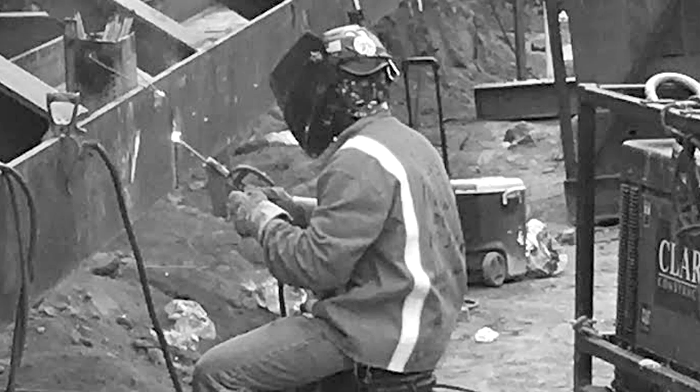I'm Dave Doolin. I grew up in Annapolis, Maryland, second generation iron worker at Local 5. My father was an iron worker before me. My name is Tony Franklin. Grew up in the Fort Washington area, been there all my life. I've been with Clark Foundation 28 years.

I'm Jose Ambriz. I grew up in Michoacan, Mexico. Came here in 1993, I was 16 years old. When I was in Mexico with my family, we were working on the farm with my dad and my brothers and sisters. The work was kind of born into me, I guess. When I was a kid, I was always building stuff when I was 4 and 5 years old with a hammer and a nail, and sometimes I got a backhand because I put a nail somewhere I wasn't supposed to.

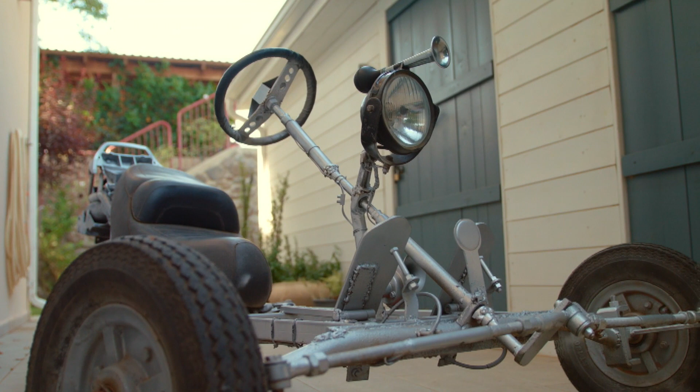When I grew up, I always liked to fix things. I like to take things apart. My mom and dad would come home and find the garage with mini bikes and bicycle parts all torn apart. So once I started fixing, man, I stuck with it, and that's what I chose. My mom worked for GM in shipping and receiving, and my dad owned his own dump trucks. So I watched him and my mom get up every morning and go to work. That made me want to work hard to do the same thing.

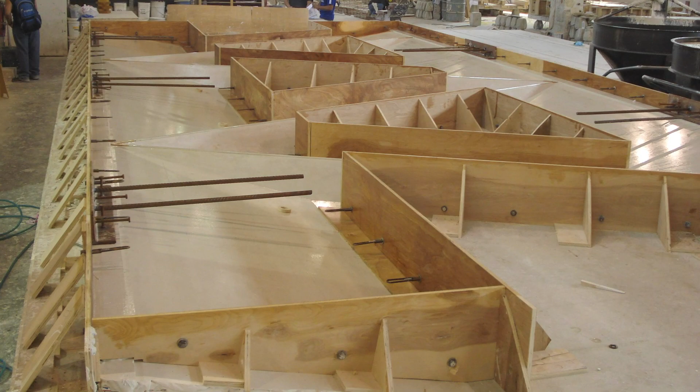I started sweeping the floors, pointing molds. After a few years, they promoted me and I moved to a steel shop. I went to another shop, on a plaster shop.

When you're working with plaster, that's amazing after you've done something. For this company, I think that's the most important thing. It's where the product comes from, and that's where the quality on the shop comes from.

And I seen the sign said Clark Construction was hiring. I started as a laborer, $7.25 an hour. I stuck with it, and here I am now.

A lot of times it's the challenges that you have on the project. The Wilson building, for example, was a curved curtain wall on an existing slab that had many different sizes, a lot of in and outs, and made it very difficult to install. And then the units were 28 feet tall too, so that was quite challenging with the weather and things like that, trying to handle those things.

I get to work 2 hours early, every day. I'm on site. When I get there, I get myself ready, prepared, paperwork, walk the site. I get up at 3 in the morning, I'm out of the house at 4, and I get to the site 4:30, 4:45. Doing it 28 years, same, getting up there early in the morning.

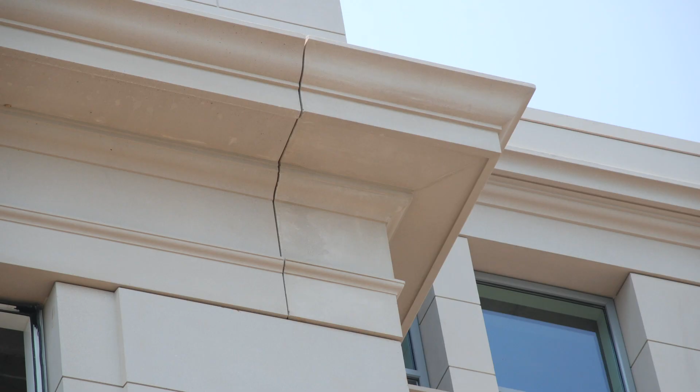I remember one that's American Pharmacists. That's a very particular job that I really enjoyed what we did. One other job was Trinity, because there was a challenge just to have it done, probably in one piece. Like in Trinity, we had to cast like 3 or 4 different pieces just to get a one piece finish. That was very challenging on one of those jobs.

The Star Award was won on the Arena Stage project, and that was a cable stay wall actually off of timber. The cables didn't hold the glass, the cables actually held the timbers up. And we had to design the wall to go onto the timber, 40,000 square feet of glass, and none of it was square. It was all canted out at 4 degrees, and it went around as a serpentine.

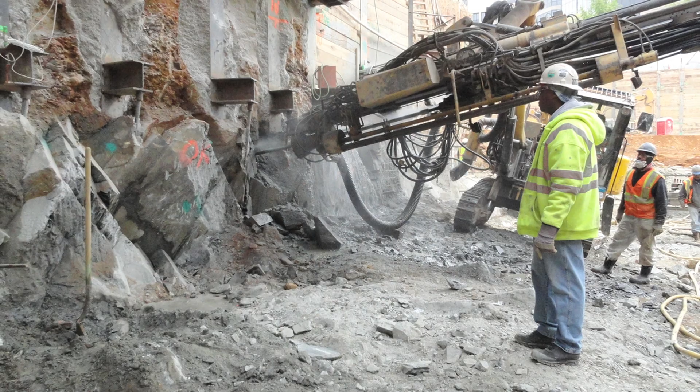The challenge is what I like. I like a challenge. They always put me on the tough jobs. Once I started running my own jobs, they give them to me, really.

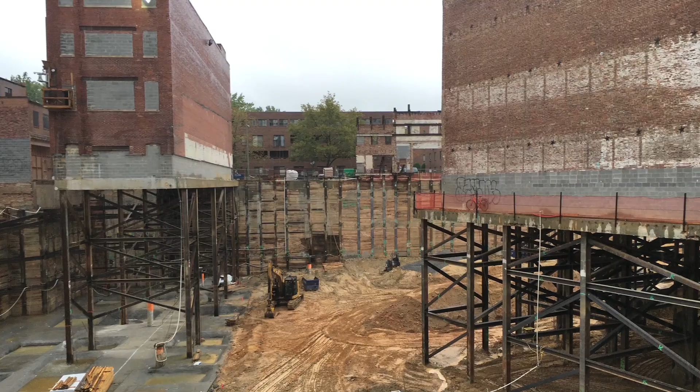We done like 1,000 Connecticut. That was a good project. Louisiana Avenue was a good project. And we just did one recently, 655 New York Avenue.

Of the architects, now in these times, they have so many weird things, all kinds. They don't want anything like a flat building all the way around. They want everything different. Every building they want different. The MGM, the challenge to cast those panels, it was complicated.

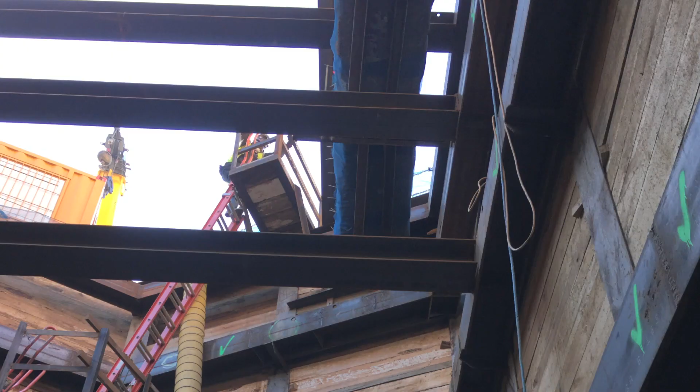If you want to do this work, you got to deal with the weather, because we're outside. There's no inside work. We're outside most of the time. But we do all type of stuff like putting in struts and steel, so it's a lot of burning and welding. People think it's just driving piles, but it's the whole foundation. It's a lot of work.

We're always looking for young apprentices to get into the trade, and it's been one of the hardest things to do, believe it or not. I really don't know whether you can make these younger people love the job. What really changed in the field is the workers.

I work with younger guys coming in, this new generation coming in. Seems like they're not focused enough, don't want it bad enough. So I try to work with them, let them know the opportunity's here if you want it, it's worth it. When I get them around me, I try to train the best I can, show them what I know, so they can put what I know, what they know, and make their own way.

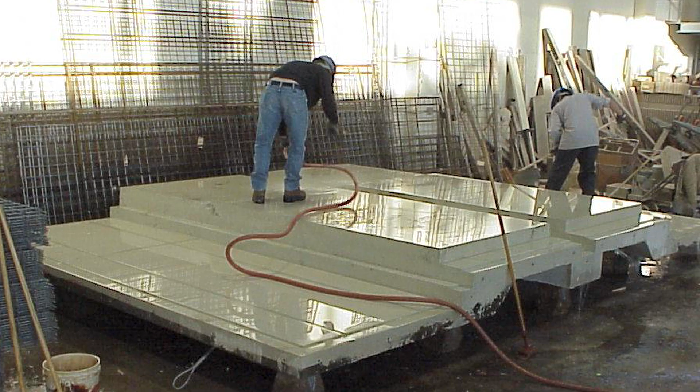I've been seeing a lot of difference between before and now. A lot of the young people, they don't have that interest to learn like we did before. I'm always able to help anybody who wants to learn. But if someone doesn't want to learn, or doesn't want to work, that's a little complicated, to teach them how to do this job.

The Star Award was really something. I mean, that was a sense of pride. For everybody involved, it was a team that made the project come together, and the right people got recognized for it. I'd like to win a couple more.

Y'all ought to keep this program. It's nice, it's beautiful. It makes people really want to work hard to try to better themselves and do a good job in their career.

When I was driving with even a friend, my family by my side, when I see a building that I know already I was involved onto it, so I told them, this building we did. I think it's a great thing.

I really do, because there's a lot of projects that you think all your hard work is going unnoticed. With the Craftsmanship Awards, it's a chance for you to get recognized, and it gives you a sense of pride in what you do. And in some way it makes you look for that on almost every project that you do.

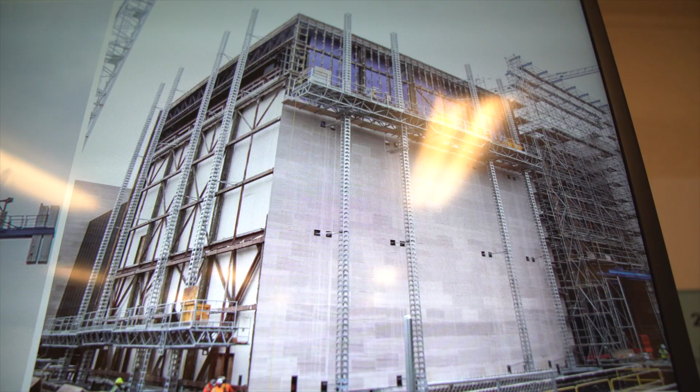Hi folks, I'm Robinson, project manager for JD Belfield on the site. I wanted to point out this picture for one important reason: it's the only chance you're going to get to see today what the phased installation looked like.

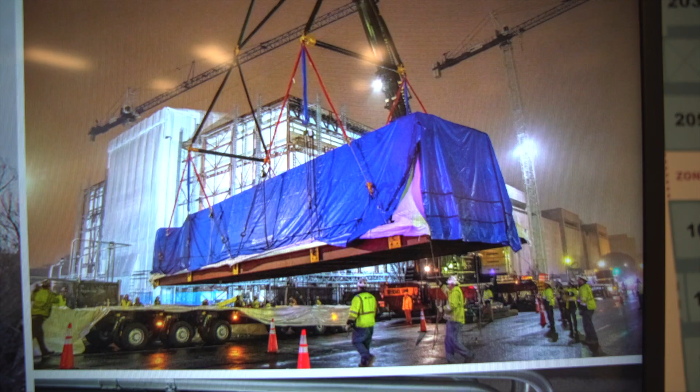When you think of a temporary roof enclosure, you have to first think about the fact that we have a steel superstructure connecting to the existing facility, passing loads into the existing facility's columns by virtue of column trees or stub outs that you can see at the bottom.

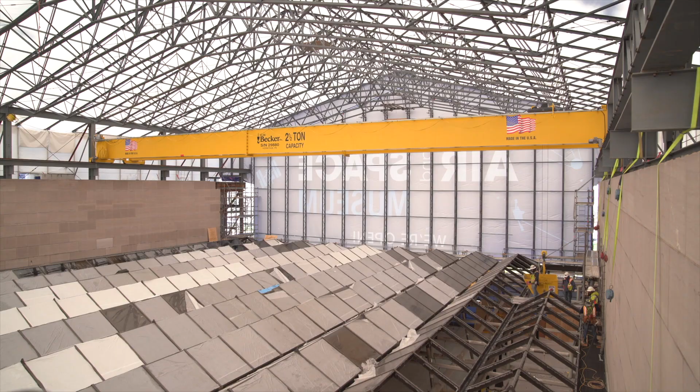One of the biggest challenges of this job was saying, how do we create a temporary roof for them to do work inside the building while the outside is being demolished, and then when we're done it looks like we were never there. Oh, and by the way, the gallery is 125 feet wide, and you have to account for 160-mile-an-hour wind loads and snow drifts up to I think 5 or 6 feet.

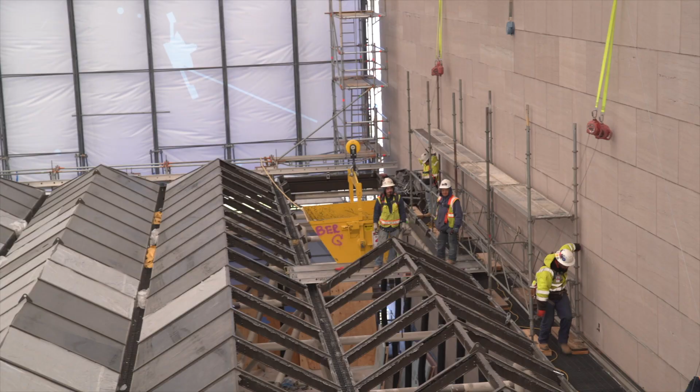Right now we're on the bottom floor of Gallery 102, and above your head you're going to see a suspended dance platform that's completely suspended from the space frame of the existing structure, so that the steel subcontractor can get up there and do upgrades to the existing space frame while that work can continue below.

So we're on the south side of Gallery 102, and what you can see here is what we call the south gable. It's an introduction up close and personal to our fabric system. It consists of a vertical track system that has a rope welt with a fabric that attaches inside. These systems are tested and designed to hold up to the snow loads, wind loads, and all the different loads that are imposed on a building throughout the time of its existence.

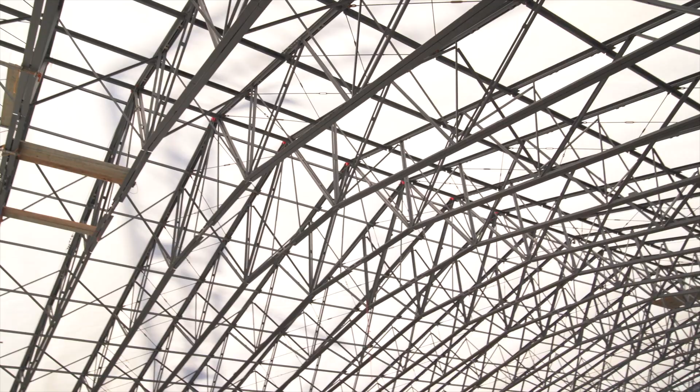There is no welding on this entire system. It is completely removable. It will actually be removed and reinstalled in a further zone in phase 2. So this material will leave the site, it will be stored for a period of time and then brought back. 100% of what you are seeing is bolted.

My name's Mary Pesic. I am an engineer with Clark. This is the National Museum of the United States Army. I'm very proud to come back to this project I helped with last year. I was here for 8 months. I'll tell you about the terrazzo process.

The contractor was David Allen. You see a pile of what kind of look like pebbles, like white pebbles, and they would mix it in a mixer with epoxy-like material, and then they would place it on the ground in the correct order. As you see, this magnificent seal has beautiful colors to show the Army seal.

After they placed the material in the ground, they would grind it with a big grinder. Once they were completed with the grinding process, we would walk it with the architect and document all the punch list items - if there were any blemishes that we could fix, if it was dirty, if it was scratched, or any pinholes or anything like that, take care of those items.

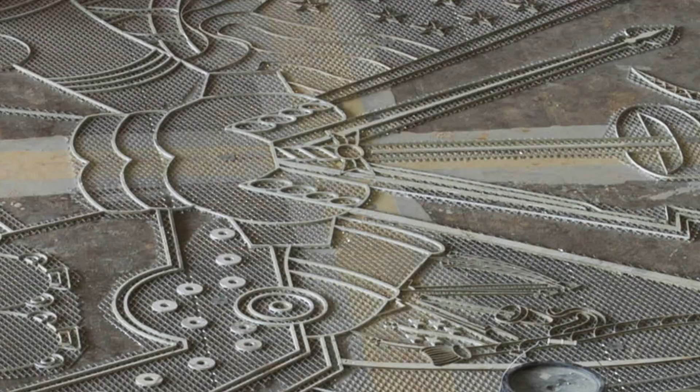We had to make sure the grid was level too, that the metal grid was just so before we placed everything. They put a sealer on it, and then we wait for that to dry, and then we protected it so that work could keep going.

We did this lobby in pieces, so we actually started, if I remember correctly, with this half over here, and then we moved to this side. We did it in segments so that we could continue work around it.

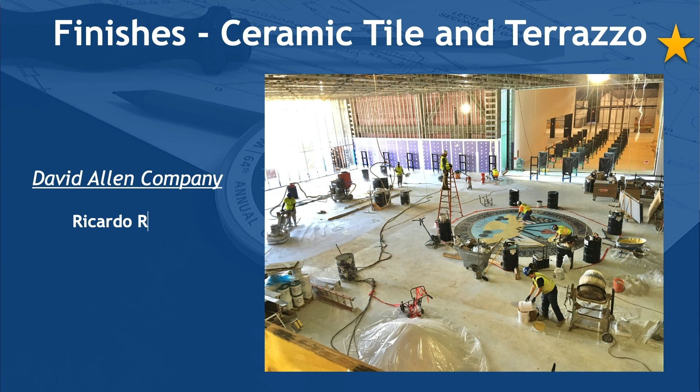In the category of finishes, ceramic tile and terrazzo, Ricardo Rosa, Enrique Torres, with David Allen Company. Project, National Museum of the United States Army.

In the category of finishes, ceramic tile and terrazzo, Viswas Alba, Alex Gavarrete, Telly Kutris, Tony Martinez, Vince McCoy, with Eris Tile and Flooring, LLC. Project, Portals 5. In the category of finishes, drywall, Ronald Diaz, Bill Dick, Elmer Monterasso Avila, Hector Pineda, Ricky Rogers, with Bradleigh Applications. Project, 6th and Historic Synagogue.

In the category of Finishes, Drywall: Ben Carper, Rick Finocchiaro, Mike Fleener, Roger Rocha, Mark Schneibolk, Jill Schneibolk-Wolfrey, with Form Construction Services, Inc. Project: Host Hotels and Resort HQ.

In the category of Finishes, Painting and Wall Covering: Christine Davies Anderson, Jonathan Castro, Rolly Oliveira, Tim Phoebus, with Hales & Howe, Inc. Project: Arlington House, the Robert E. Lee Memorial Preservation.

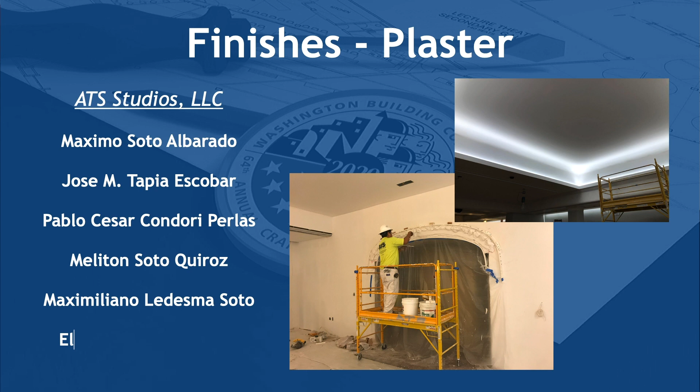In the category of Finishes, Plaster: Máximo Soto Albarado, José M. Tapia Escobar, Pablo César Condori Perlas, Melitón Soto Quiroz, Maximiliano Ledesma Soto, Elmer Ferrufino Zurita, with ATS Studios, LLC. Project: DAR Museum Gallery.

In the category of Finishes, Plaster: Christine Davies Anderson, Jonathan Castro, Rolly Oliveira, Tim Phoebus, with Hales & Howe, Inc. Project: Arlington House, the Robert E. Lee Memorial Preservation.

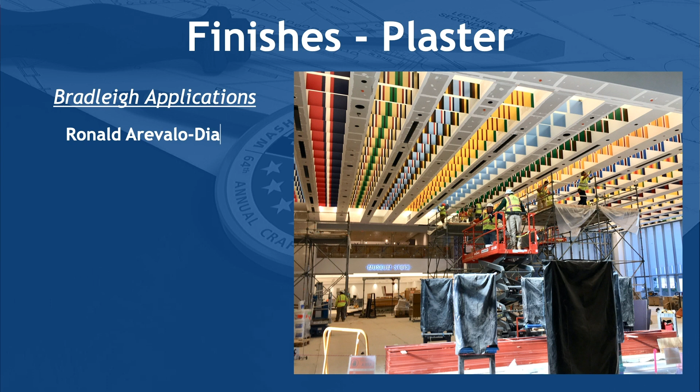In the category of Finishes, Plaster: Ronald Arevalo Diaz, Delfín Cayapa Pazzi, Elmer Monteroso Ávila, Héctor Pineda, Jesus Soto Soto, Santiago Trujillo, with Bradleigh Applications. Project: National Museum of the United States Army.

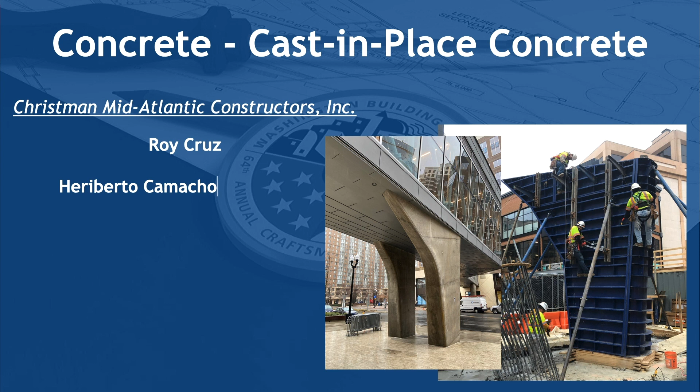In the category of Concrete, Cast-in-Place Concrete: Roy Cruz, Heriberto Camacho Hernández, Daniela Holguín, Miguel Rivera Portillo, Donald Thurston, Candelario Torres, with Christman Mid-Atlantic Constructors, Inc. Project: Boston Quarter Retail Renovation.

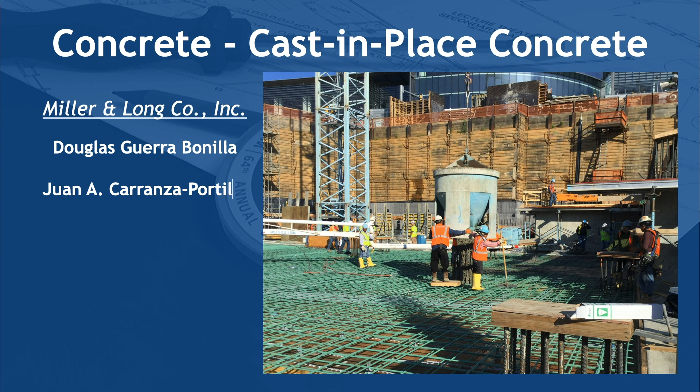In the category of Concrete, Cast-in-Place Concrete: Douglas Guerra Bonilla, Juan A. Carranza Portillo, Jose N. López, Oscar A. Mendoza Méndez, Alex Montiel, Mike Smith Sr., with Miller & Long Company, Inc. Project: Capital One Center Garage Podium and Corporate Events Center.

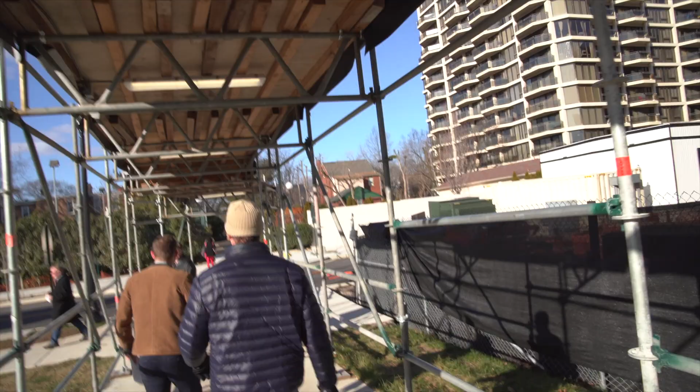This is where all the steel comes together. This is where everything is really supported throughout the building with a lot of steel truss, a lot of concrete, a lot of tonnage. We call each floor a bar - there's 5 floors, I'll refer to them each as bars as they fan out. The top part of each bar actually attaches to the bottom part of the next bar.

This is a brick rain screen. This is not your traditional brick and mortar. How this works, how it attaches back: you have steel metal supports or steel metal clips that attach back to the drywall. You then have brick trays, long horizontal trays that span anywhere you see brick. They're all snapped into a steel tray behind it. Each brick is specially molded so that it locks in and snaps in, so it's actually a pretty tight fit.

A cool feature from this rain screen - this is the largest depth system ever installed for this brick. It's called the Corium brick. It's about a foot from the drywall back to the face of brick. These soffits, just on this pivot alone, there's about 12,000 brick between these 8 soffits that you see. And as we come around, you may have seen it on the way in, there's a big feature one on the entrance to Wilson that's just 6,000 brick on its own. So it's just a lot of brick soffits on this building.

You'll actually see at the top part of each of these bars, the top 3 feet of brick is attached to the floor above. Another interesting part about this is there's no cement in this mortar, it's all a lime base. It's supposed to be a self-healing, very malleable type mortar.

It's an historic point-up mortar. It allows for more movement because of the rain screen design, since it's all cantilevered on metal. It's a little more forgiving.

What's interesting here is each building, when you get to these intersections at the end, comes in at a 22.5 degree angle, so it's very tight. We went through a few scenarios and even did some shop drawings to prefab these inside corners because of the tight angle.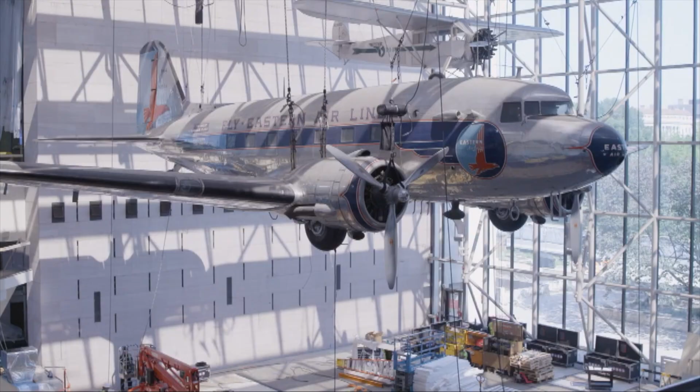I think the thing that's interesting about this project that makes it a little different than others is that we have to keep the museum open while it's going on, and it's still full of artifacts. So it's not just a construction project, it's also an artifact move project, and that's definitely added a layer of complexity. One of the challenges was we've got to depopulate all of the artifacts in the building.

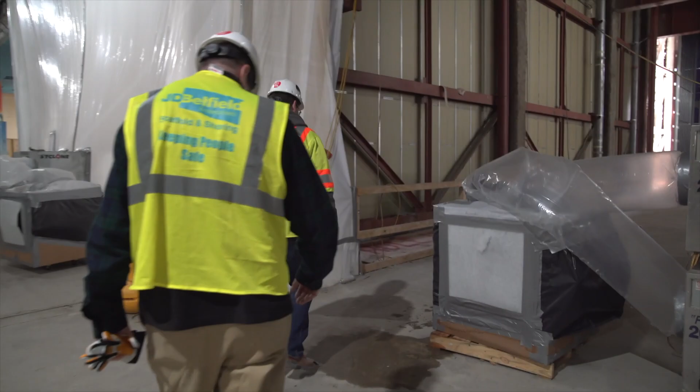For this half of the building, it's somewhere in the neighborhood of 17,000 artifacts. These are fully weighted aircraft, not small replicas and lightweights. I'm Kyle Nolan, the CPM for the move contract for CSC.

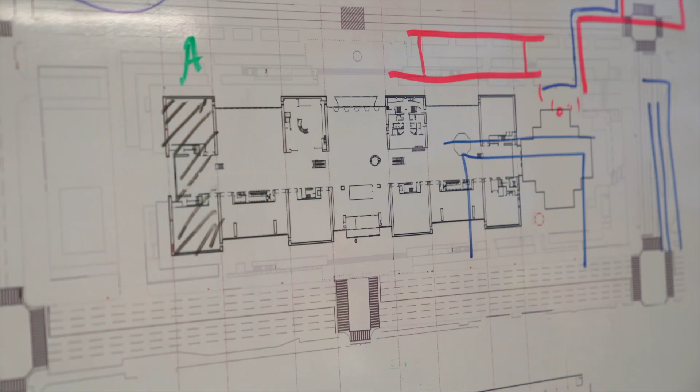I'll use this graph to explain. The building's in 7 zones overall. When we started on the move side, zone 1 and 2 is where we were. In the garage, they were all the way to zone 6. So while we were actually taking things to West Terrace, as Russ just mentioned, we had to expedite the base construction reinforcement. We did all the FRP around the columns, additional steel reinforcement, because we couldn't even get some of the planes out of the building at that time.

My name is Russ Dusek, and I work with iWay. I designed and executed, along with my team, all the rigging related to the project. This is much different than anything else I've worked on. I've moved a lot of artifacts, but what was truly amazing was just the number of people involved and the coordination effort that had to happen, and all the different disciplines that had to come together to ultimately be able to lower the DC-3.

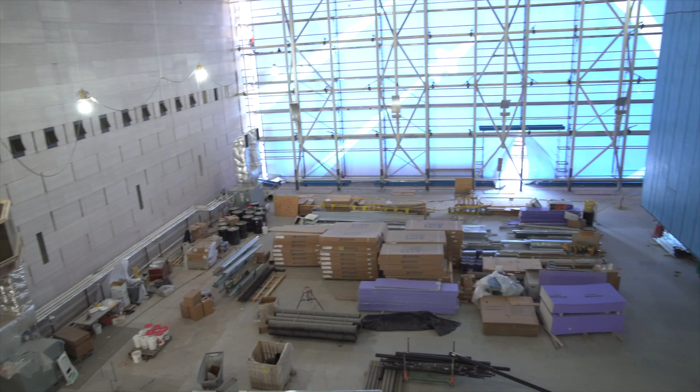So we are now standing in Gallery 102, one of the 3 main big atriums in the Air and Space Museum. There were, I believe, 8 airplanes hanging here that were some of the largest in the entire collection of the Air and Space Museum. They all were installed here while the museum was being built, and the museum was finished around the artifacts.

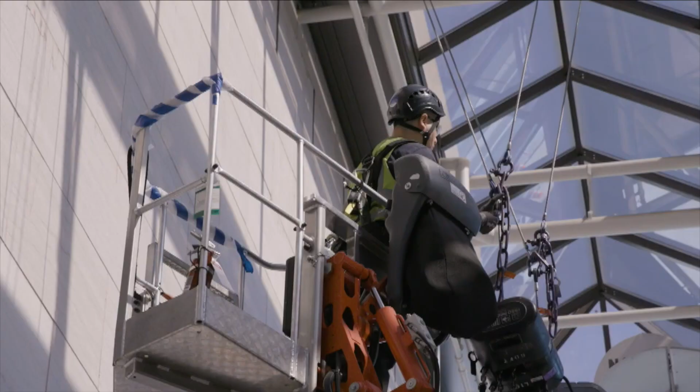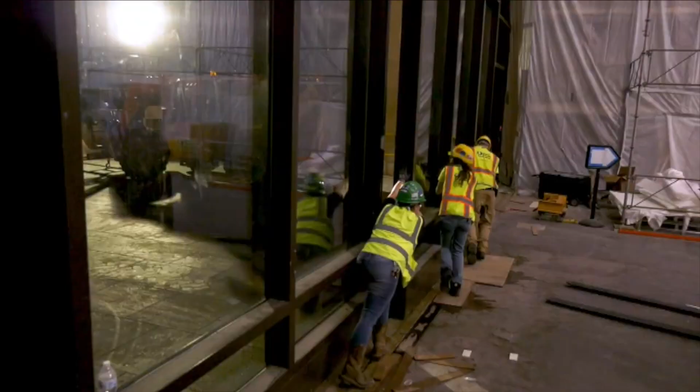Russ, do you want to get into the specific rigging challenges of these artifacts? This is some of the biggest artifacts we had to deal with. Once it was lowered to the floor, these artifacts were big enough that I additionally had to come up with rigging submittals and the same process to disassemble them, because just the wings on the DC-3 were too large for just a few people to grab and take off and put on a cart. But once again, circling back to what everybody keeps saying here, the coordination effort on this extremely large project was just astounding that it went as smoothly as it did, and it did go very smooth.

Now, we would like to recognize our second set of award winners in the metals, mechanical, and special construction categories.

In the category of metals, metal panels: Rick Dickens, Ron Neff, Tyler Vogel, David Watson, with Tecta America East, LLC, Project National Museum of the United States Army.

In the category of metals, miscellaneous metal fabrication: Michael J. Burros, Oscar Flores, Andreas Papas, Jose Villatoro, Robert Windsor, Nicolas Sorica, with TLP Steel Erectors, Project Tegna.

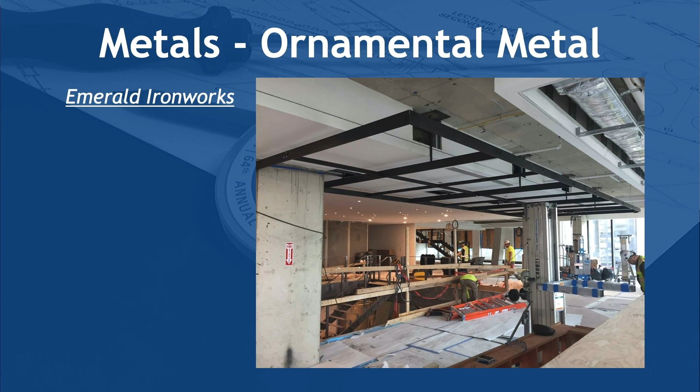In the category of metals, ornamental metal: Noe Carballo, Luis Céspedes, Erick Garcia, Troy Knotts, Jason Taylor, Byung Yoon, with Emerald Ironworks, Project JBG Smith Headquarters.

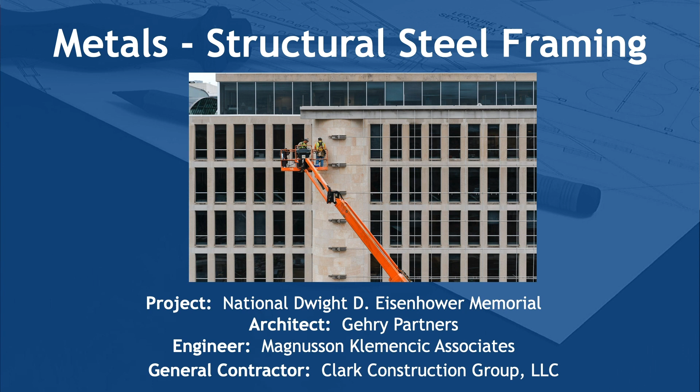In the category of metals, structural steel framing: Jeffrey Collier, Anthony Capusta, Randy Keller, Robert Ocasio, Keith Ritalik, Paul Swigert, with Crystal Steel Fabricators, Inc., Project National Dwight D. Eisenhower Memorial.

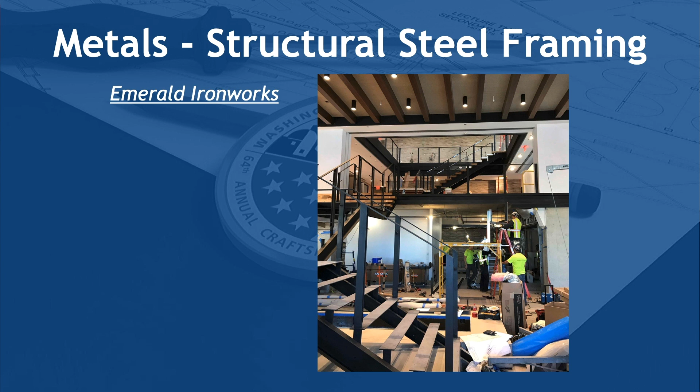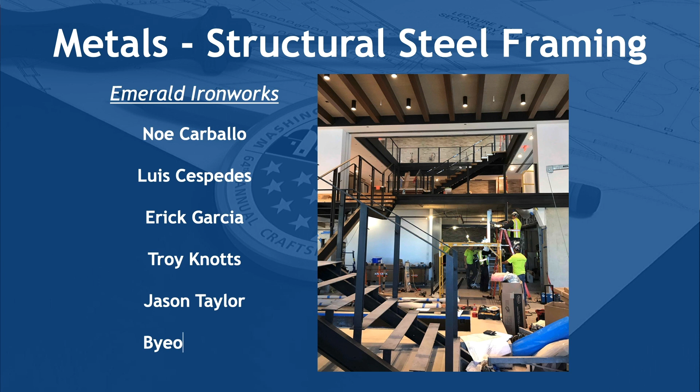In the category of metals, structural steel framing: Noe Carballo, Luis Céspedes, Erick Garcia, Troy Knotts, Jason Taylor, Byung Yoon, with Emerald Ironworks, Project JBG Smith Headquarters.

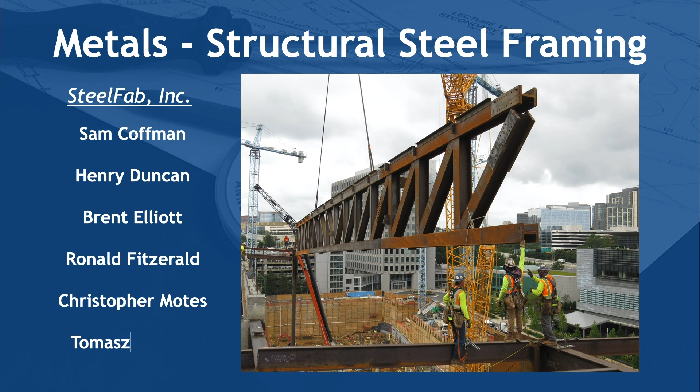In the category of metals, structural steel framing: Sam Coffman, Henry Duncan, Brent Elliott, Ronald Fitzgerald, Christopher Motes, Tomasz Pasierb, with SteelFab, Inc., Project Capital One Hall.

In the category of metals, structural steel framing: Russell Bell, Chuck Jones, Mark Stryker, Jim Yowell, John Yowell, Mike Yowell, with Maryland Fabricators, Inc., Project City Ridge.

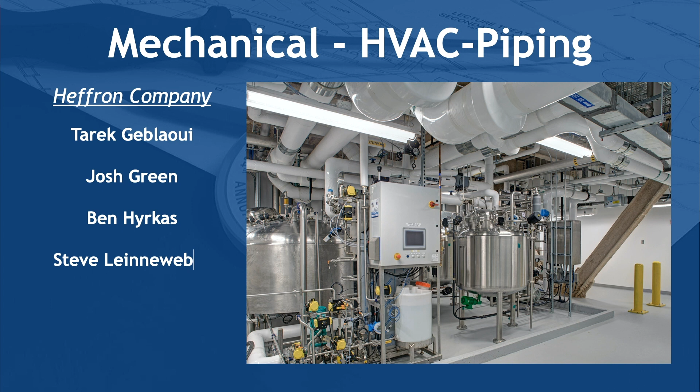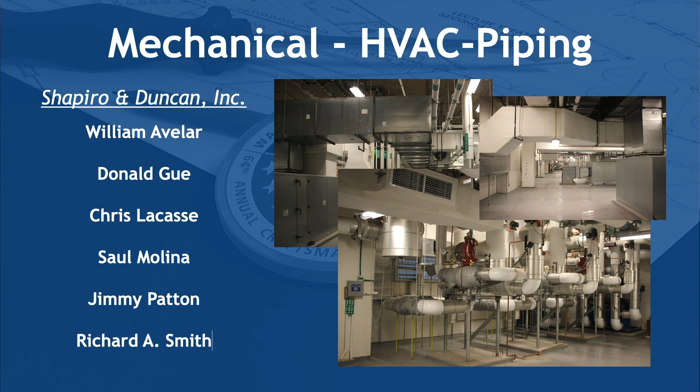In the category of Mechanical, HVAC Piping: William Avelar, Donald Gue, Chris Lacasse, Saul Molina, Jimmy Patton, Richard A. Smith, with Shapiro and Duncan, Inc., Project Inova Loudoun Phase 2B Patient Tower.

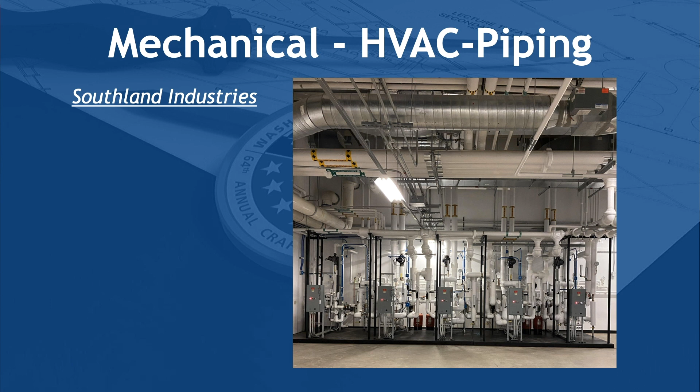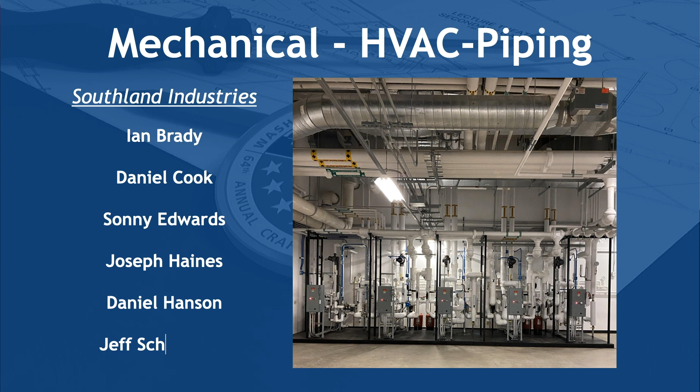In the category of Mechanical, HVAC Piping: Ian Brady, Daniel Cook, Sonny Edwards, Joseph Haines, Daniel Hanson, Jeff Schwabline, with Southland Industries, Project National Museum of the United States Army.

In the category of Mechanical, HVAC Sheet Metal: Aaron Ittenbach, Russell Johns, Daryl Milsteed, Jimmy Redding, Ben Rowe, Ray Sprouse, with ADJ Sheet Metal, Inc., Project Carnegie Library Renovation.

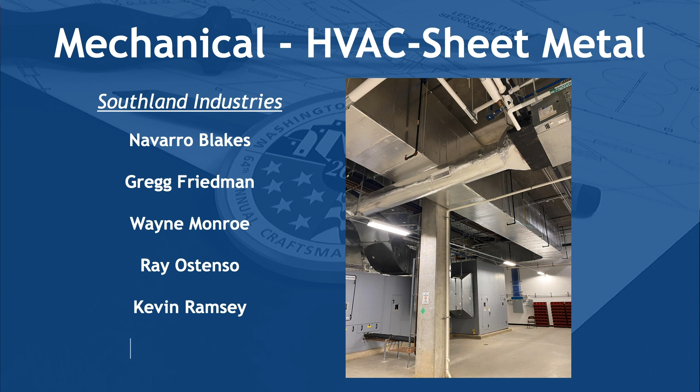In the category of Mechanical, HVAC Sheet Metal: Navarro Blakes, Gregg Friedman, Wayne Monroe, Ray Ostenso, Kevin Ramsey, Bobby Roberts, with Southland Industries, Project National Museum of the United States Army.

In the category of Mechanical Plumbing: Bob Hawk, Michael Hawk, Sean Masamacha, Cody Snyder, Harold Snyder, Tim Williams, with North Star Fire Protection, Project 6th and I Historic Synagogue.

In the category of Special Construction Demolition: Dave Kavanaugh, Jeff Gayon, Melvin Solis, with Celtic Demolition, Project 1050 17th Street.

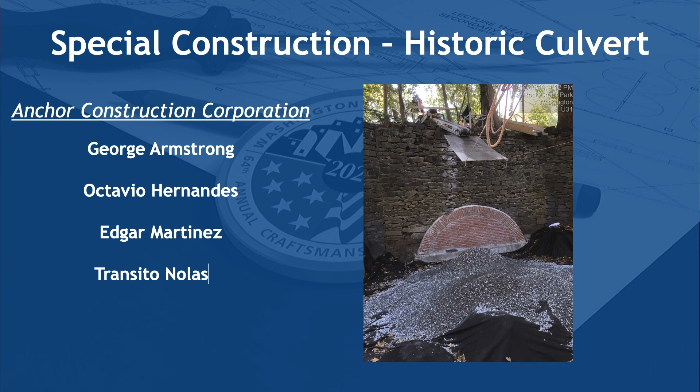In the category of Special Construction Historic Culvert: George Armstrong, Octavio Hernandes, Edgar Martinez, Tránsito Nolasco, Victor Rodriguez, Jose Sarabia, with Anchor Construction Corporation, Project 44th and Reservoir Road Rehab Culvert.

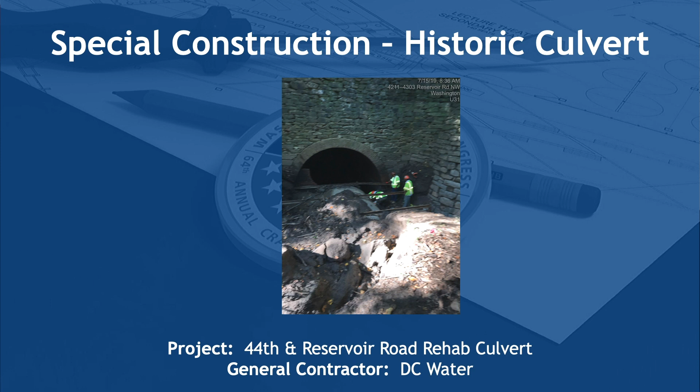In the category of Special Construction Rain Screen: Marcus Go, Chris Lemon, Derek Taylor, Rich Sunyoger, with Kalkreuth Roofing and Sheet Metal, Inc., Project Inova Loudoun Phase 2B Patient Tower.

In the category of Special Construction Rain Screen: Walter Calderon, Cando Gonzalez, Oscar Hernandez, Jose Martinez, Armando Pineda, Andrew Taylor, with Calvert Masonry, Project The Heights Building.

In the category of Special Construction Roofing: Obed Hernandez, Ariel Lemus, Victor Lopez, Freddie Navarrete, Andrew Tybor, with Wagner Roofing Company, Project Annapolis Post Office Restoration.

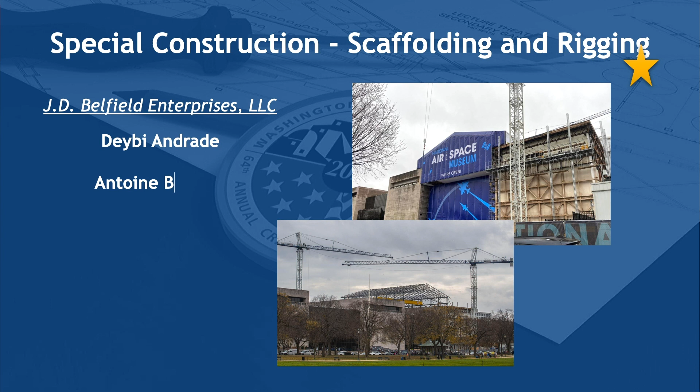In the category of Special Construction Scaffolding and Rigging: Deybi Andrade, Antoine Boykins, Benji Coffey, Ron McKinney, Robinson Whitaker, Dennis Wilson, with J.D. Belfield Enterprises, LLC, Project National Air and Space Museum Revitalization.

In the category of Special Construction, Scaffolding and Rigging: Walter Aristondo, Benji Coffey, Brett Friedel, Eric Guthrie, Mamerto Hernandez, Robinson Whitaker, with Scaffold Resource LLC, Project Restoration of the Jefferson Memorial.

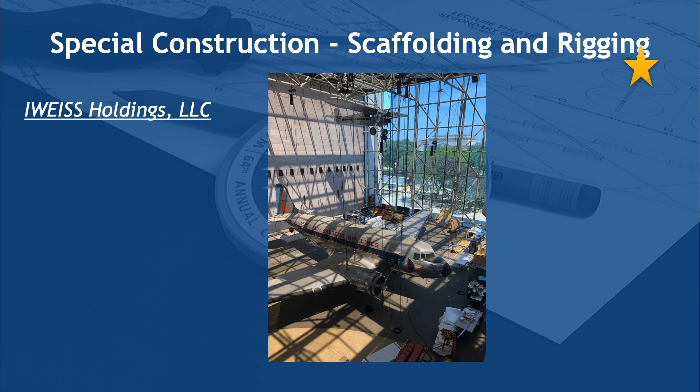In the category of Special Construction, Scaffolding and Rigging: Ming Chen, John Chip Daly Jr., Russ Dusick, Dave McIntyre, with IWEISS Holdings, LLC, Project National Air and Space Museum Artifact Move and Logistics Coordination Services.

Let's take a moment to enjoy the third video segment showcasing this year's Star Award nominees in the categories of Masonry, Exterior Stone, Carnegie Library Renovation, and Woods and Plastics, Architectural Millwork.

So everybody, we're here at the Carnegie Library. This was originally donated by Andrew Carnegie to Washington, D.C., and it was open to the public in 1902. We did a complete restoration and cleaning of the outside of this building. Every surface you see today, Lorton has touched. All of the dentil work, this entire facade, was completely restored from top to bottom. There are 18 windows around the project, and all of them had completely new pediments.

They'd all pretty much dissolved over the 120 years, so all the windows were restored in place with the frames, and Lorton was able to come in and carve all new 18 pediments. Each one was replaced with new stone from the same quarry up in Vermont. All the solid bronze rails are one complete component, and we had to come up with a plug detail that was carved by Lorton that had to fit exactly with the stone and the bronze handrail, with the intent that you'd never notice it.

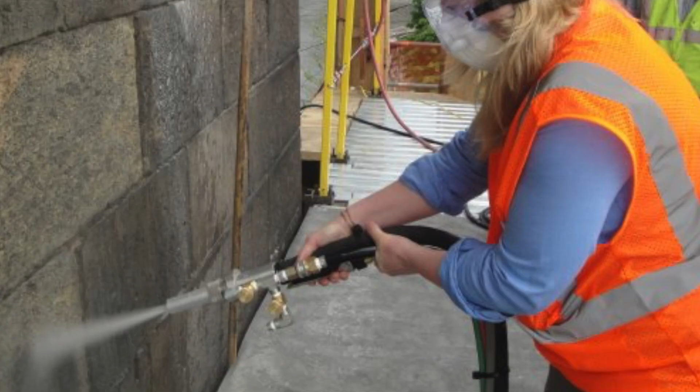The cleaning of the facade was done mainly in two components. General cleaning, which is a detergent cleaning - there was a separate detergent for the marble and another for the granite. But we found the building was very heavily stained. It hadn't been cleaned for who knows how long, and that wasn't enough. So we ended up using the Rotec Vortex system, a combination of glass beads and water - it's an abrasive but non-abrasive system. That removed pretty much all the yellow stains throughout.

The other element of the restoration is all the carvings. All the pediments you see now are all new, all 18 of them. Every single one was hand carved by our carvers in-house and then fitted into the column capitals.

For access into the building, we had to lower the grade for ADA access, and when the new pavement was lowered, it exposed the dirt and unfinished stone that had been buried underneath the old sidewalk. So Lorton had to come in, take measurements, and recarve all new pieces to slide into place. This is a clear example where the new grade is now down here - this whole stone had to be recarved, and the old stone came to about here. So we took that out and put in new stone to get it down to the finished elevation of the sidewalk.

This main element is where you really get that pass-through between the modern and the classic of the building. This whole entrance took about a year of development to get from the design goal to an actual product. What they were able to accomplish was quite astounding.

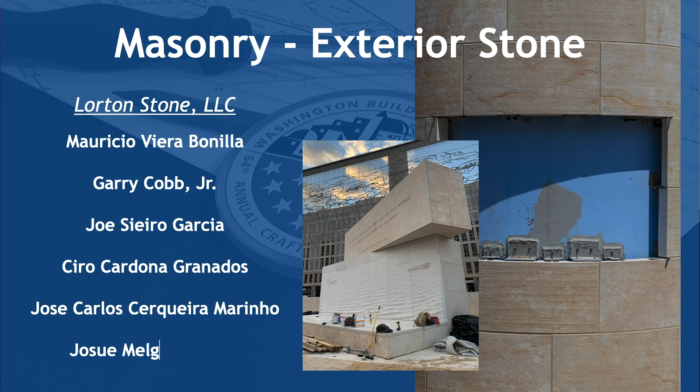Project, Carnegie Library Renovation. In the category of Masonry, Exterior Stone: Mauricio Viera Bonilla, Garry Cobb Jr., Joe Sieiro Garcia, Ciro Cardona Granados, José Carlos Cerqueira Marinho, Josué Melgar Portillo, with Lorton Stone LLC.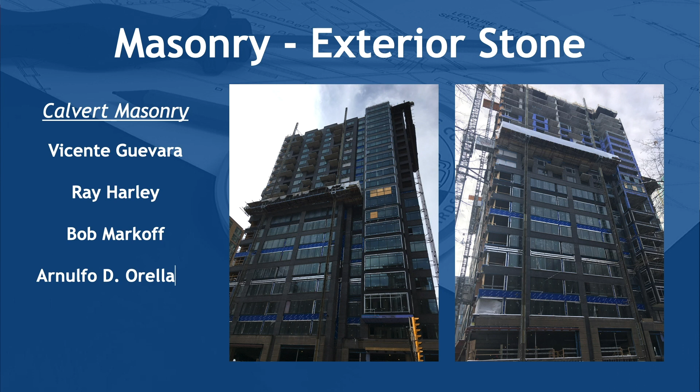Project, National Dwight D. Eisenhower Memorial. In the category of Masonry, Exterior Stone: Vicente Guevara, Ray Harley, Bob Markoff, Arnulfo D. Orellana, Miguel Queseda, with Calvert Masonry.

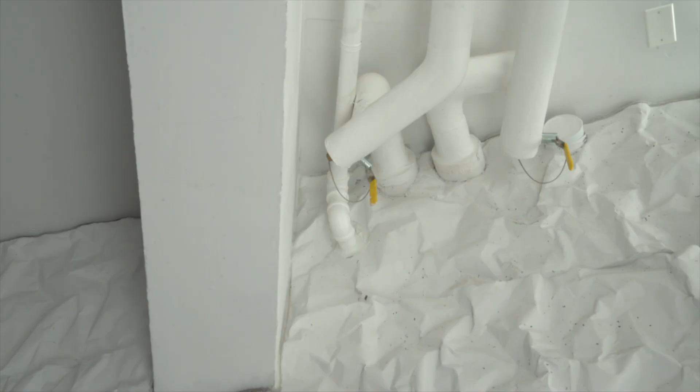The system is a complete Class A system. There was not a single box that was lost during this install. We had a motto out here: if we could get air through a conduit, we were going to get wire through that conduit. Everything was architecturally placed.

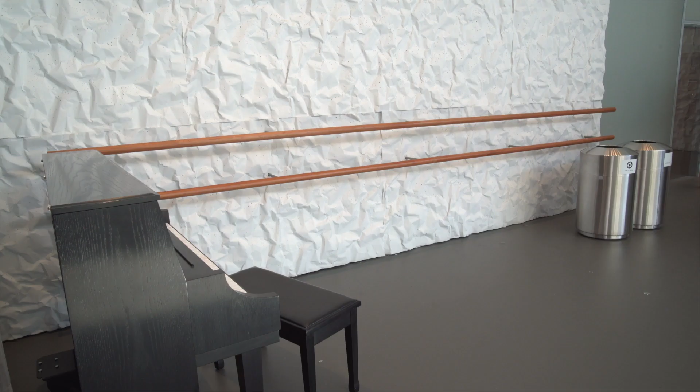All in all, by the time it was done, we had over 8 miles of cable. In order to network this whole expansion panel, it started off as conduit and FPLP cable. We got most of the pipe ran, and it got changed to networking with MI cable. That was a first for me - I had never worked with 18-2 shielded MI cable before. And there was about 3,200 feet of that to get to the closest panel.

We've got the events pavilion right in front of us. This is all done in concrete, roughed in prior to concrete being poured. This is all still being fed from where we originated downstairs - different loop, different circuits, but still being controlled by the same location.

We were down to a 16th of an inch trying to get everything in line. Like I said, this is boxes in the concrete into forms, then them pouring concrete on top of it. Planning ahead, that's the biggest thing - that's what made this work.

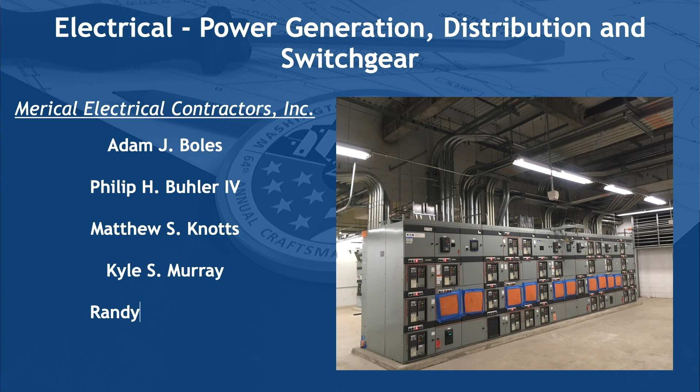In the category of Electrical, Power Generation, Distribution, and Switchgear: Adam J. Boles, Philip H. Buhler IV, Matthew S. Knotts, Kyle S. Murray, Randy A. Sansbury, Jeremy A. Woodall, with Merical Electrical Contractors, Inc. Project: Central Utilities Plant Modernization and Upgrade Project.

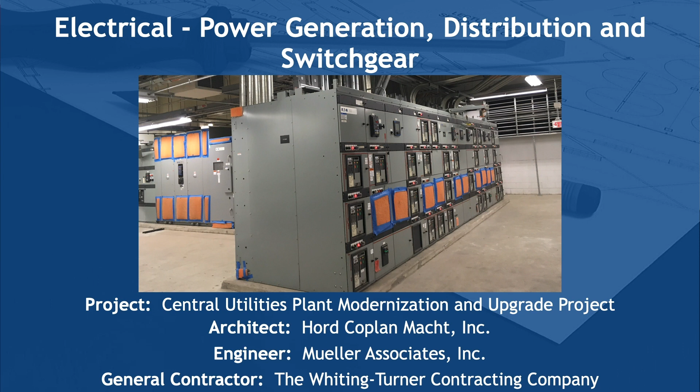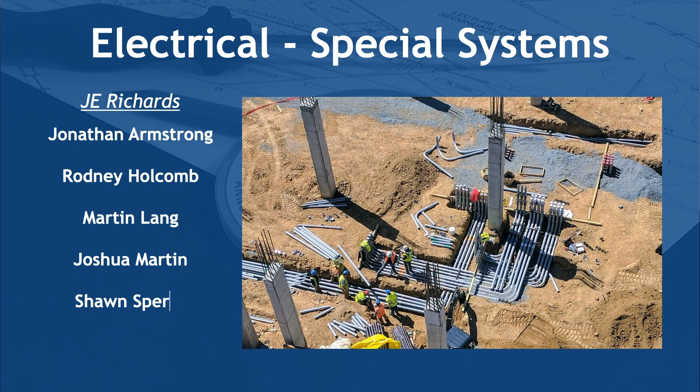In the category of Electrical, Special Systems: Jonathan Armstrong, Rodney Holcomb, Martin Lang, Joshua Martin, Shawn Sperry, Jonathan Spivey, with J.E. Richards. Project: Washington Adventist Hospital.

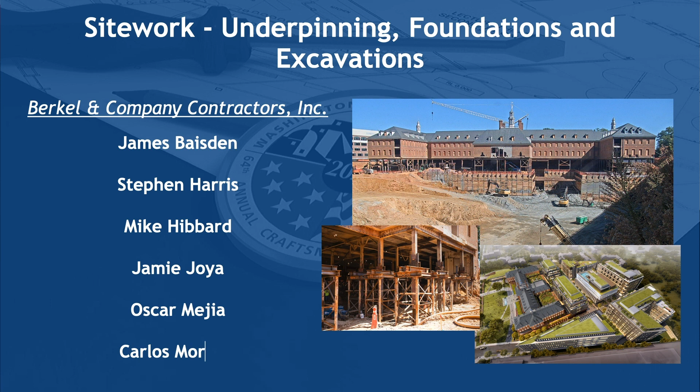In the category of Sitework, Underpinning Foundations and Excavations: James Baisden, Stephen Harris, Mike Hibbard, Jamie Joya, Oscar Mejia, Carlos Morales, with Berkel & Company Contractors, Inc. Project: City Ridge.

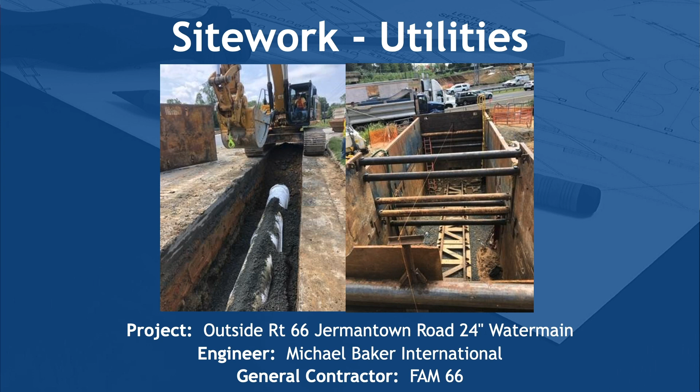Now for the moment we have all been waiting for, the announcement of the 2020 Star Awards winners. In 1992, WBC past chairman Darryl Ripito created the Star Awards. Star Award winning craftsmen are recognized for exhibiting the highest level of expertise in their trade. Eight Star Award nominees were selected from the 85 Craftsmanship Award winners this year. Nominated craftsmen exceeded established criteria to achieve a level defined as exceptional in one of the Star Award categories.

The three Star Award categories are Excellence in the Face of Adversity, Technical Excellence, and Visual Excellence. Star Award winners were selected by a panel of three industry professionals with expertise in different aspects of the commercial construction field. We would like to extend a special thanks to our Star Award judges: Allison Andrews with the M Group, David Labe with Balfour Beatty, and Barry Mark with Capital One.

And now we would like to take a moment to individually recognize the Star Award nominees. For Woods and Plastics, Architectural Millwork: Portals 5. Electrical Lighting Systems: Kennedy Center, The Reach. Special Construction, Rain Screen: The Heights Building. Finishes, Ceramic Tile and Terrazzo: National Museum of the United States Army.